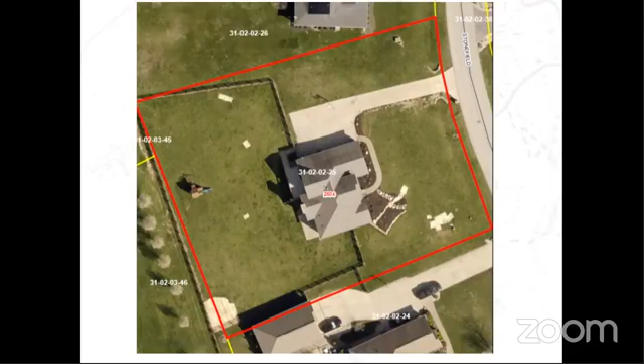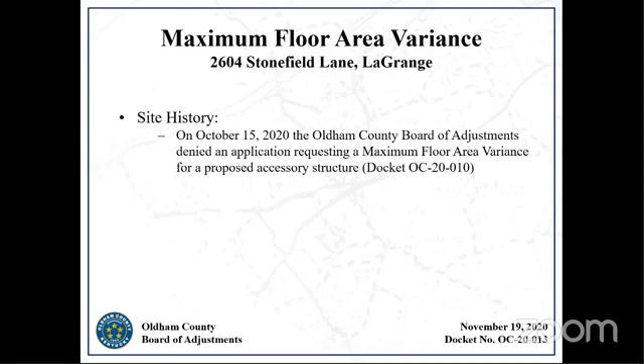Site history: on October 15, 2020, the Oldham County Board of Adjustments denied an application requesting a maximum floor area variance for the proposed accessory structure, that was docket OC-20-010. The applicant is proposing a 1,200 square foot detached garage with a 720 square foot roofed open area breezeway for a total of 1,920 square feet on the property.

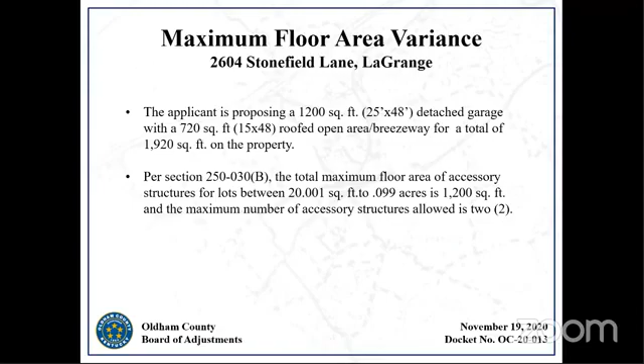Per section 250.030 item B, the total maximum floor area for accessory structures for lots between 20,000 square feet and 0.99 acres is 1,200 square feet, and the maximum number of accessory structures allowed is 2. The total square footage is 720 square feet over the allowable 1,200, and that portion is just the roofed area, the open area that we'll call the breezeway or the carport area.

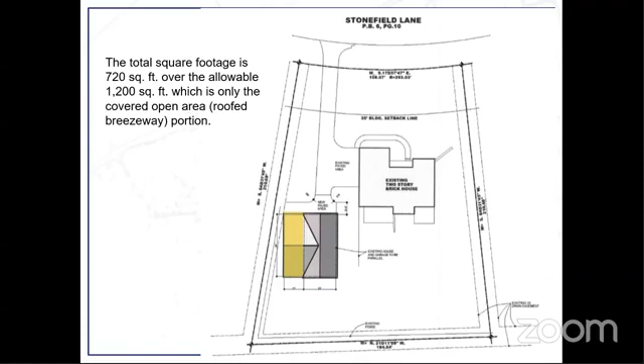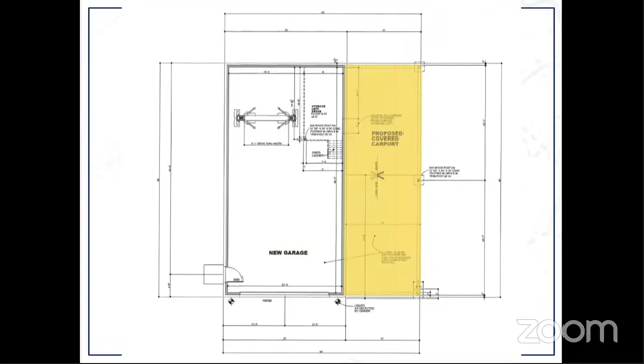The covered open area will be for equipment storage, which includes a flatbed trailer and other lawn equipment, and additional parking area for the owner and use as future parking for the children. The structure will be constructed with similar material to that of the home, which is considered brick with stone accents.

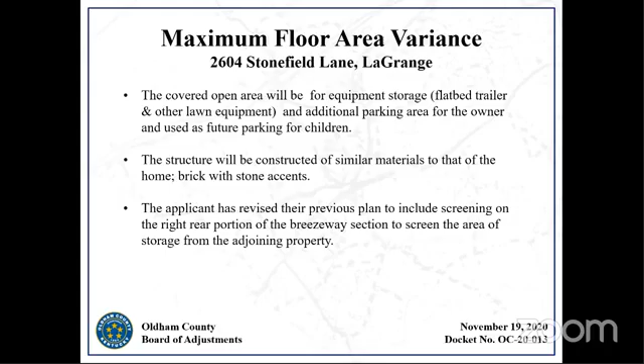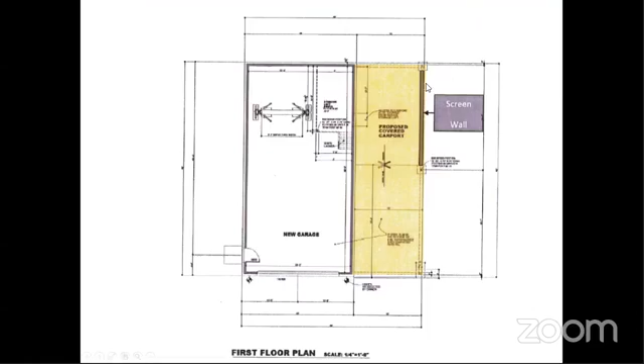The applicant has revised their previous plan to include screening on the right rear portion of the breezeway section to screen the area of storage from the adjoining property. So these are the updated renderings that show the screening on the right rear section. So again, this just gives you an overview. You'll see here. Letters of support from all adjoining property owners and the homeowners association were included with the application. So you have that from your previous case as well as this one.

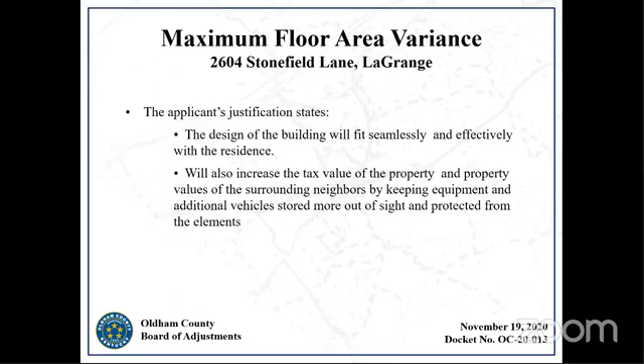According to the applicant's justification statement, the design of the building will fit seamlessly and effectively with the residence, will also increase the tax value of the property and property values of surrounding neighbors by keeping equipment and additional vehicles stored more out of sight and protected from the elements. So this is the property, the subject property of 2604 Stonefield Lane.

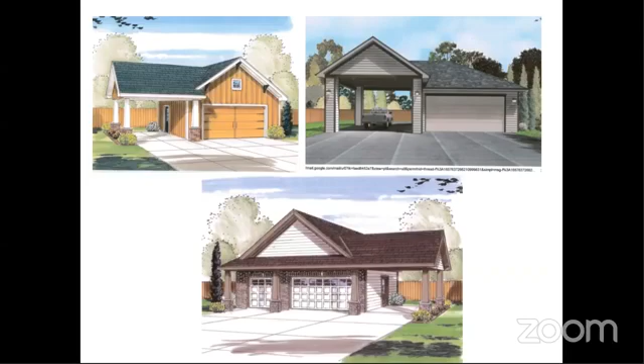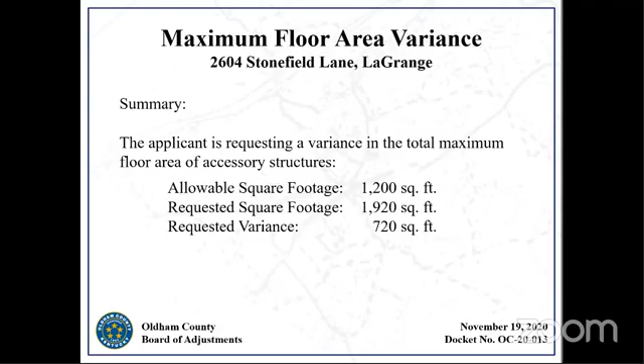This is the approximate location of where the detached structure will go. It will be at the end of the current driveway into the rear yard. These are the renderings that were provided by the applicant. So in summary, the applicant is requesting a variance in the total maximum floor area of accessory structures. The allowable square footage per the ordinance is 1,200 square feet. The requested square footage is 1,920. So the requested variance is 720 square feet, again, which is the open portion of the carport. And I will be happy to answer any questions.

I have a question. This variance that he's requesting amounts to a 60% variance. Is that in line with the history of the board and granting floor area variances in the past, or is it excessive? Well, each application stands on its own, so we don't compare the other applications to the ones that are being presented. They're based off of the applications that are submitted with the justification. Okay, thanks. And I'll just add to that, that I don't remember, not that it hasn't happened, that we've had a similar request in this neighborhood.

With Mike Riley's tutelage, I looked over the cases for the previous 2 years just to get a sense of how the board operates. And I couldn't find a 60% variance anywhere. Now, that doesn't mean there's not one out there, but I couldn't find one. That's why I asked the question. I think the one last month was close to 60%, was it not? Maybe 50%? That's the one where we just had the sketch instead of an actual scale drawing. Is that the one you're referring to? Correct. Yeah, I've had second thoughts about that one, but it's gone.

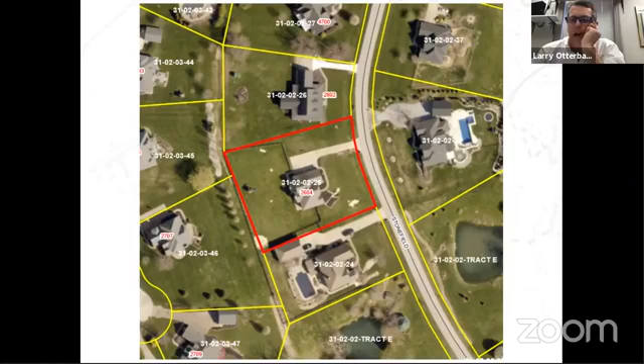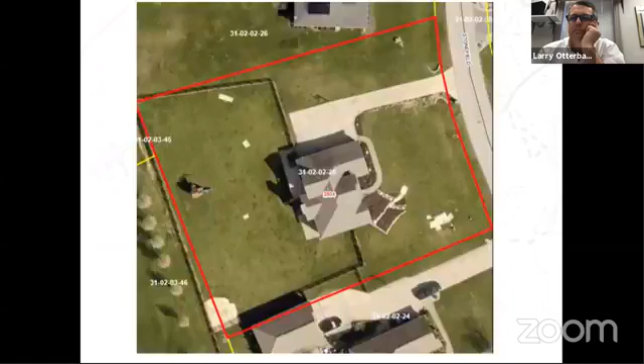And could you show me a picture? There is a proposed site plan in your packet. Could you show me the property south? I want to see that carport or garage. So this is the property to the south. This would be standing in the street, the property to the left of the applicants. So you can see the garage here, and then this is the actual structure. All right, very good. Thank you. You can go back to gallery view, please.

Fred, to answer your question from last month, the existing structure was 30 by 40, so 1,200 square feet. The applicant was proposing a 20 by 30 addition, which is 600 square feet. So that increase will be 50%. Thanks.

Thanks, Tom. Mr. Riley is attempting to join the meeting. Is board member Funk on with us? Yes, Ron's here. Okay, he's just not in my view, so thank you.

Okay, board members, any other questions for Amy? Okay, thank you, Amy. And Brandon, you're the applicant, correct? If I can get you to raise your right hand, state your name and address, and Amy, if you can get him sworn in. Sure. Do you solemnly swear to tell the truth, the whole truth, and nothing but the truth? Yes, I do. Just state your name and address for the record. Brandon Embry, I live at 2604 Stonefield Lane. All right, very good, thank you.

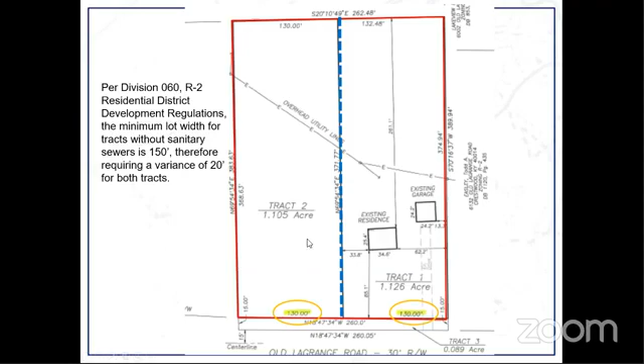Per division 060, the R2 residential district development regulations, the minimum lot width for tracts without sanitary sewers is 150 feet. Therefore, that requires a variance of 20 feet for both tracts. The total lot width is only 260 feet, so they're basically cutting it in half to have each of the lots be at 130 feet.

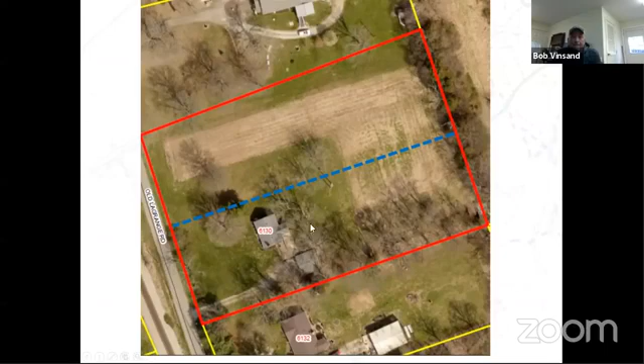Okay, thank you Amy. Any other questions for the applicant? Mike, knowing you don't have video, are you okay, do you have questions? No, I have no questions.

All right, very good, thank you. Amy, did we get any letters of support or opposition? No, we did not. Very good. Is there anybody here wishing to speak in favor of the application? Please speak up, so I've got to scroll through multiple screens. Anybody in favor?

Okay, anybody opposed? Okay, very good. Bob or Dean, do you have anything else to add? No sir, not at this time. All right, very good, thank you.

Board members, please speak up, do you have questions for anybody? I have no questions, thank you Mike. Okay, I'm ready. Well, no, I'll close the floor for the public hearing and open it up for general discussion among the board members.

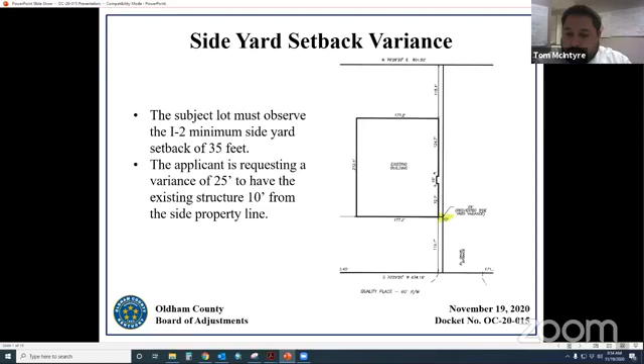The applicant is proposing a minor plat to create a proposed tract 2, shown in yellow, totaling 2.62 acres. This new proposed tract will have frontage along 146 and Quality Place. The applicant's justification states that the existing parcel has a railroad spur line on the north side. By allowing the side yard variance and creating the additional parcel, the spur can give access to a new user, which complies with objective land use 1-3.1.

Properties in the area have been divided in a similar manner as the proposed property division. Several large tracts have been divided over the years, probably in part due to the installation of sanitary sewers. The original building and parcel had a very large septic lateral field to serve the building, and this is no longer necessary. Commercial properties in the area are currently being divided and developed in a similar manner as this proposal. By allowing the 25-foot side yard setback variance, the applicant can create the new parcel at 2.6 acres, which is compatible with other uses in the commercial area, and which also complies with objective land use 3-2.1 of the comprehensive plan.

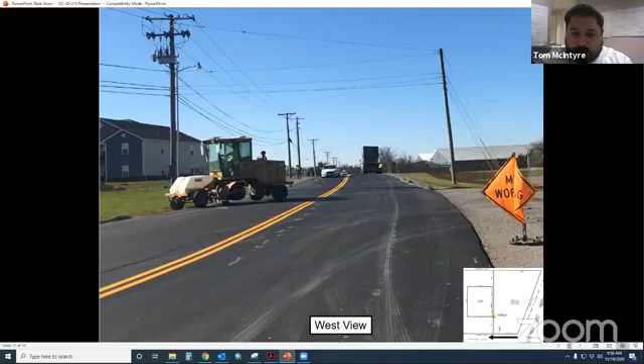So in total, the applicant is requesting a side yard setback variance. The required side yard is 35 feet, and the applicant is requesting 10 feet. Therefore, the variance will be 25 feet.

I think you do that in appeal, but all right, very good. Tom, is that it? Yes, sir. They may. Thank you. You can go back to gallery view. Actually, before you go back to there, I have a question related to one of the pictures. Sure. What slide would you like, Mr. Hutchins?

Could you pull up the one actually showing the building from where you're standing on the ground? Yeah, like this one? I think so. There's a variance. The history of the site has this variance requested to make it where it's as high as 68 feet. I don't know where that is or what part that is. So as you know, just because you get a variance doesn't mean they necessarily built it. They just have the ability to build it that high.

So I did misspeak in saying that it is 68 feet. They have the ability to go up to it. I don't know if they did or not. I didn't look far into whether they got building permits, but that's just through the site history. That's what I found. Okay. And I'll ask the applicant for more history.

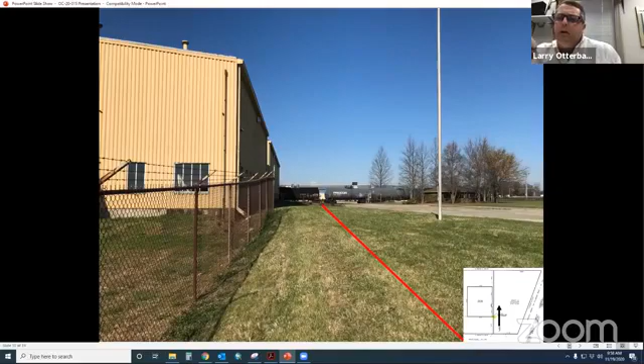Tom, the side where they're asking for the variance, let me see a different view of that, please. Okay, you say that's the only structure that's on where the variance will be? Is that correct? The proposed tract, this is the only existing structure. That's correct. Okay. All right. Any other questions for Tom? Board members?

Please speak up. Okay. Tom, if you can go back to gallery view, please. All right. Let me see here. Yeah, here we go. Stop share. Okay, thank you, Tom. If the applicant could raise your hand, please. All right, very good. Thank you.

I'm seeing two, are one of you an attorney? Good morning, Mr. Otterback. I'm Joni Bodorf, the attorney representing GHC Properties, LLC. I'm also here with Mr. Jay Hall and Mr. Jason Greer. Great, thank you, Joni. Okay, if you want to justify the project. We need to swear in the applicants. They're going to testify. Do you solemnly swear to tell the truth, the whole truth, and nothing but the truth? We do.